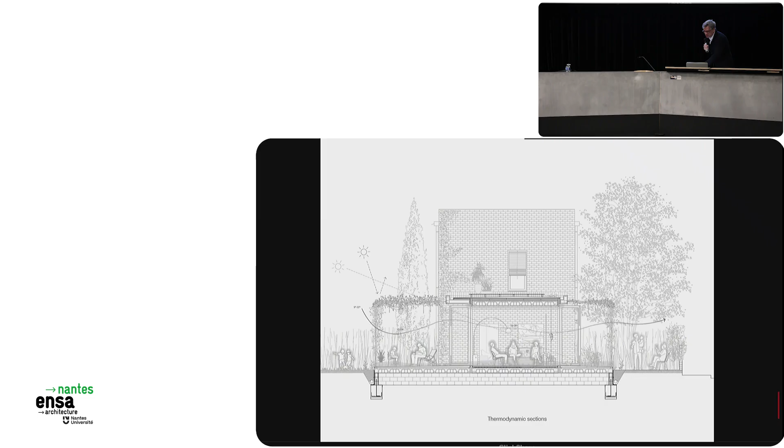During these 15, 18 years, what has happened is while we were doing very tough, very pragmatic, very dogmatic projects based on sustainability, where sustainability was the challenge of the office, the final objective of everything we did, doing projects in zero energy, passive behavior, being very serious in all that kind of stuff.

But we have discovered that at the end, the final experience could be really intense, could be really fantastic, even extraordinary. So it was thanks to that first approach, based on ecological concern, that we have discovered that what is really interesting is to project the experience.

So that's in general the big concept of the evolution of the office: go from sustainability to the experience, going from dogmatic strategies to projecting the human being's experience into the architectonical space.

And I think it's interesting to talk about beautiful, about extraordinary, about experience, because in this ecological crisis where we are living, we have to be conscious that we are losing the narrative. We are talking all the time about catastrophes, and we need to recover the narrative about the ecological crisis in order to present to society a hope that a better living is possible thanks to sustainability, not the opposite.

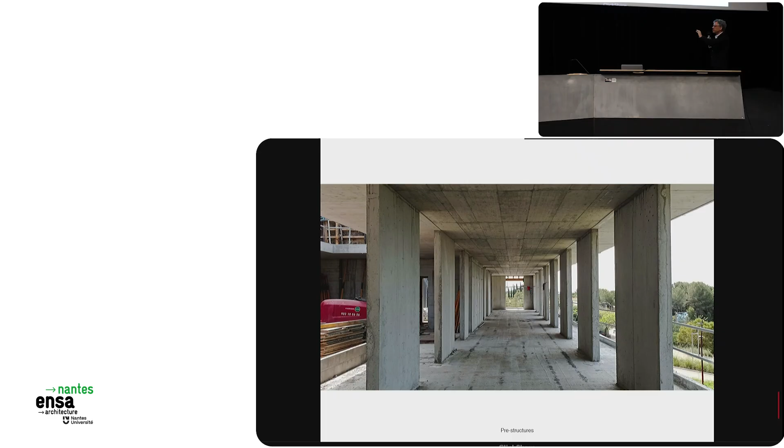But the title of this transhistorical concept is not our concept—it's a concept developed by this critic, Andrea Rubi, who, by observing our buildings, came to this idea that was quite interesting to us: that in our buildings, maybe because the structures assume a lot of attributes, a lot of the conditions of the experience, these structures link the building with a large time before the project and a large time in the future. So in his observation, the structure gets a level of autonomy, so that what the architect has done looks like just a basic occupation of the space.

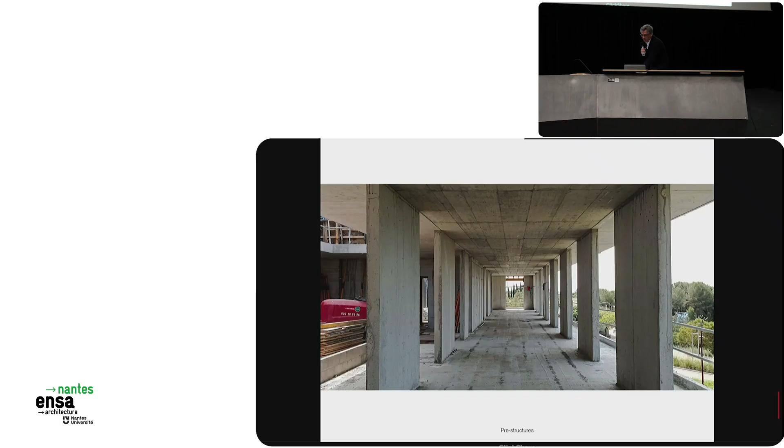So we design structures that look as if they were already there. Our newest structures look, in Andrea Rubi's opinion, like a pre-existing construction where we just basically colonize, just put some stuff inside. And I quite agree. I like very much this idea of the structure as something that tries to be more permanent, lasting in time, than just the circumstantial, provisionary occupation of the space.

Time is a continuous event. There's an idea that quite obsesses me—the idea that the absolutely new doesn't exist. The absolutely new is not possible. We are just part of a process, and we have to assume that we are just transforming matter for a lapse of time.

But by assuming this, maybe it's possible to produce more lasting structures, more lasting buildings, able to assume the change of society, able to live for longer time, and then become ecologically interesting because this structure is able to adapt to how society changes. And to give some examples of that transhistorical concept, I want to show you some projects.

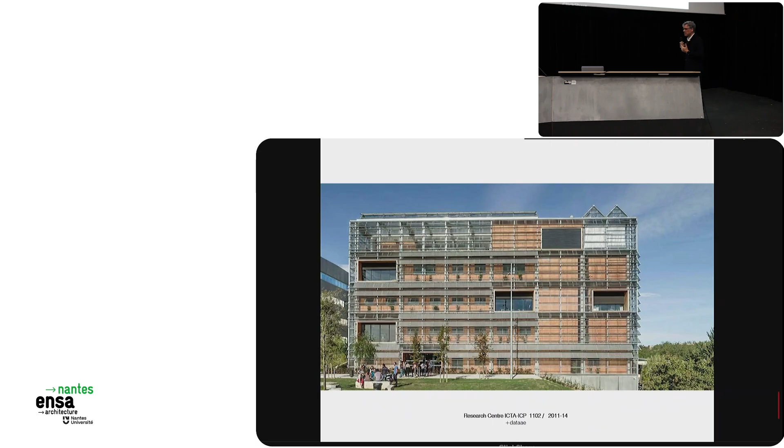This building is important for us in our history as an office. This building was done about 3 years before we did this competition, and we were really impressed and conscious about the politics and ideological level of this building. It was part of our research when we did this competition. Of course, it's not the same, but it's really nice for me to explain this project in this building tonight.

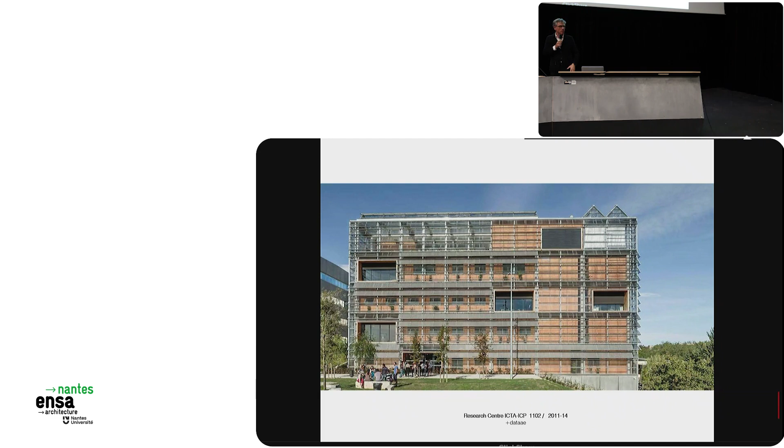This is a research center close to Barcelona for a university, focused on environmental research. So it was really important to develop a building that was really radical in terms of sustainable strategies. We won the competition by presenting a very clear, simple strategy.

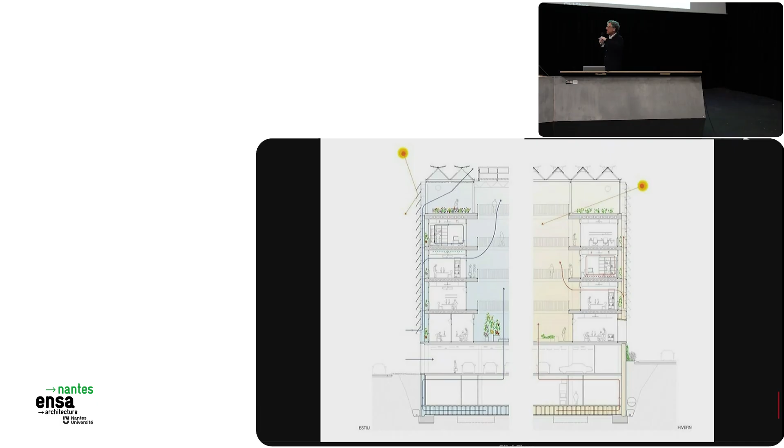It's not a building with a greenhouse on top, which was part of the commission conditions. It's a building into a greenhouse, which is a little different. We thought in the competition—and this is how we won—that just because of the behavior of the greenhouse in Mediterranean conditions, it could work as simply as imagining the greenhouse as a closed envelope during winter, getting sun gains through the greenhouse effect, and becoming a shade system in summer with a lot of ventilation to achieve comfort. Quite simple, very potent.

We developed the project with this greenhouse system, able to be completely open in summer and able to close in winter, with this double approach dividing the permanent from the available and reversible parts of the building: the structure as something that has to last forever, and the cladding system, the facade system, as something provisional that can be changed in the future.

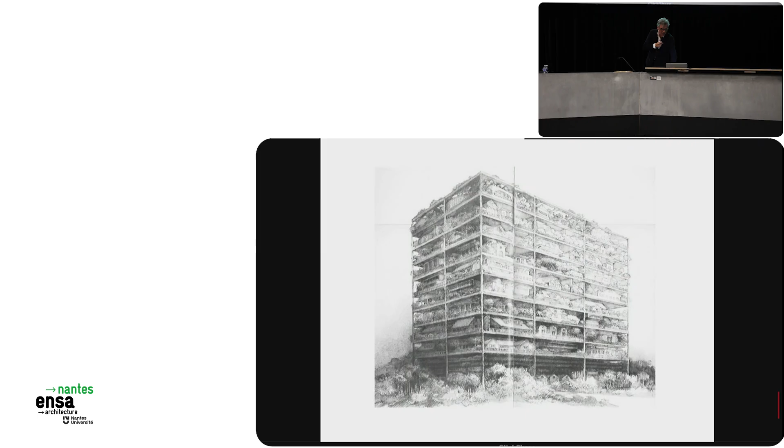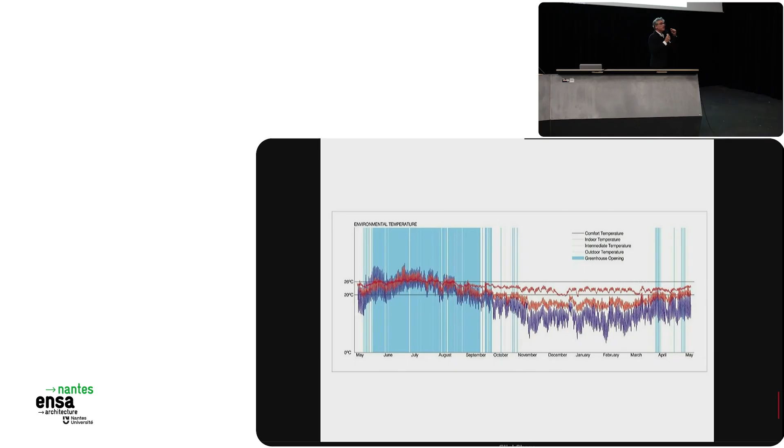The general strategy was to have passive comfort in the intermediate spaces, and just in the closed spaces a little more active systems. But it was not enough. Comfort was only possible when we introduced the weight, the heaviness of the structure, into the simulations—when we introduced the inertia, the physical performance of the structure's mass into the system.

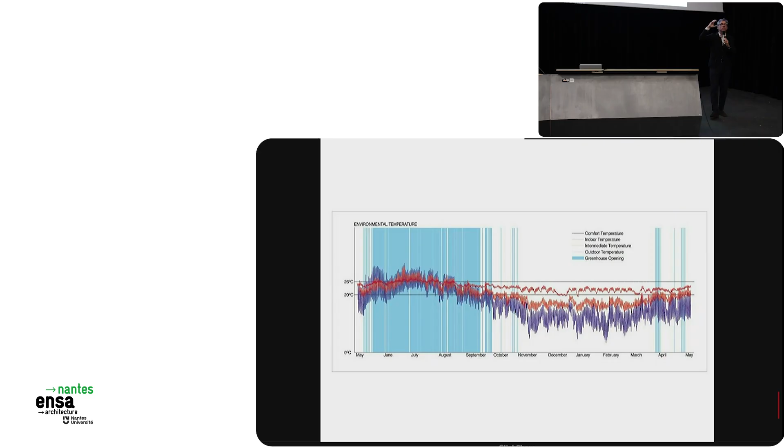Then summer comfort was possible, because the inertia, the mass of the structure, works as a sponge—it works like a storage of energy. During the day, this weight stores the excess heat, and during the night, thanks to natural ventilation, the excess heat dissipates. So just when the structure came into the simulation, comfort became possible.

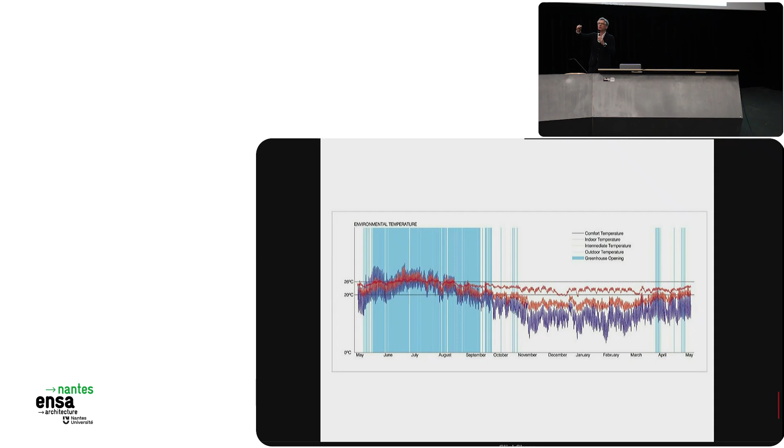From this step, we decided to make clearer this idea that there's something permanent, which is the structure, and something reversible, which is the provisional divisions, the facade. And not only that—the structure is not only a supporting performance part of the building, not only a tool that helps balance temperatures during the day and seasons, it could be something else: the real heritage of the building, the real state of the building.

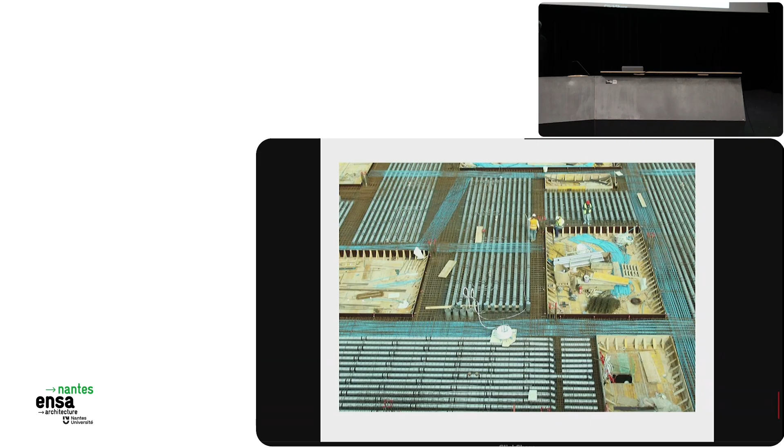So we began introducing all the attributes possible into the structure. It's about the structure, about the support, about the temperature, but also about ventilation, also about active systems. We placed the heating and freshening systems into the same slabs. We placed everything, even acoustic conditions, by framing the structure in a sinuous silhouette to help the acoustics.

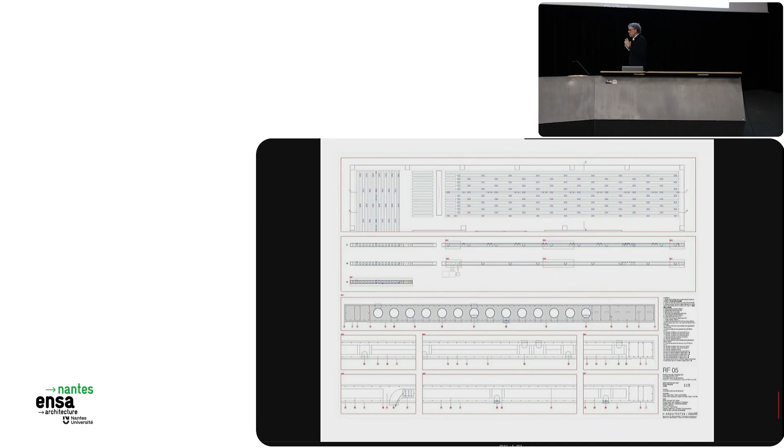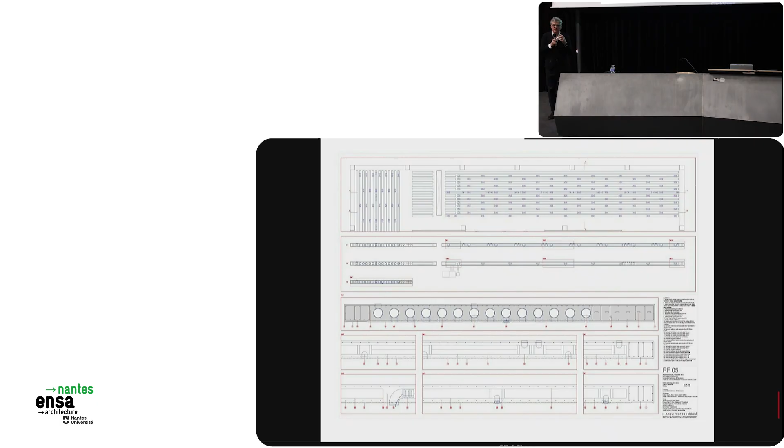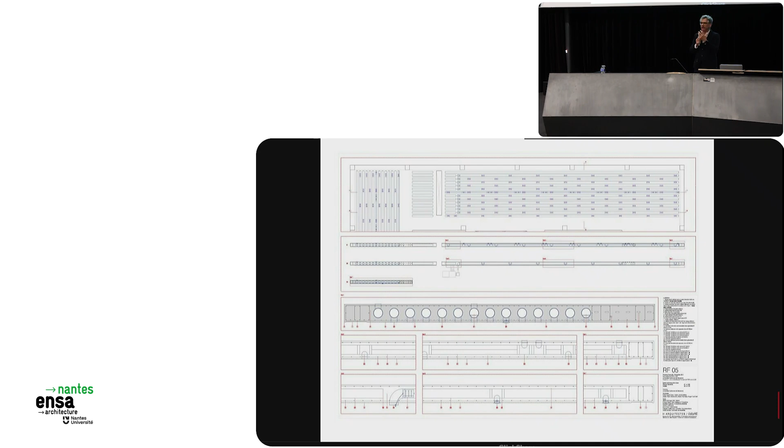So this was the first building where we began with this idea that the structure is the part of the building we are interested in giving most of the attributes of the experience. This is something that makes the experience stronger and more clear, because it's in the most permanent part of the building. The rest is pure occupation—just a colonization that will change with time.

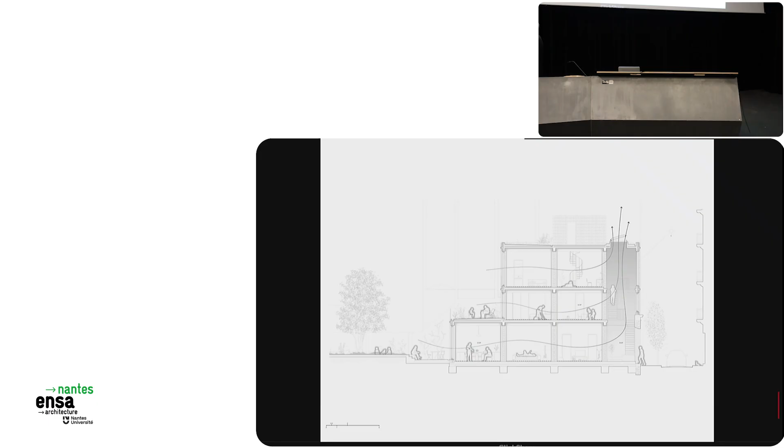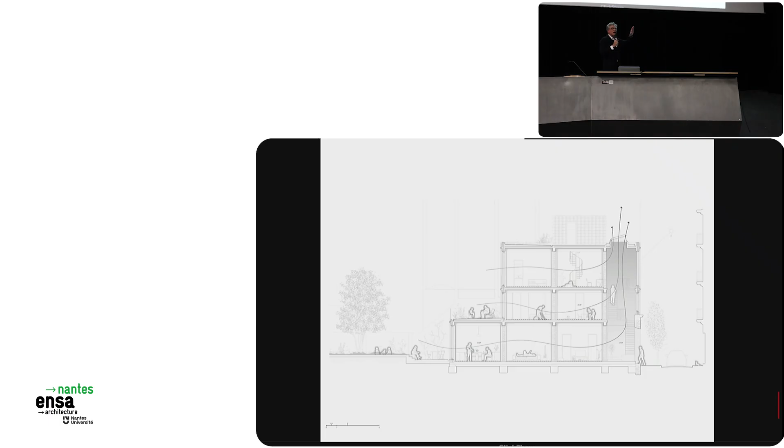This is an attached house in the center of Barcelona with a very simple strategy based on section. The section divides privacy: daily activities on the ground floor, kids on the first floor, parents on the second floor. It's an easy section with open space, no divisions. But in this case, the structure is what I'd call a filter.

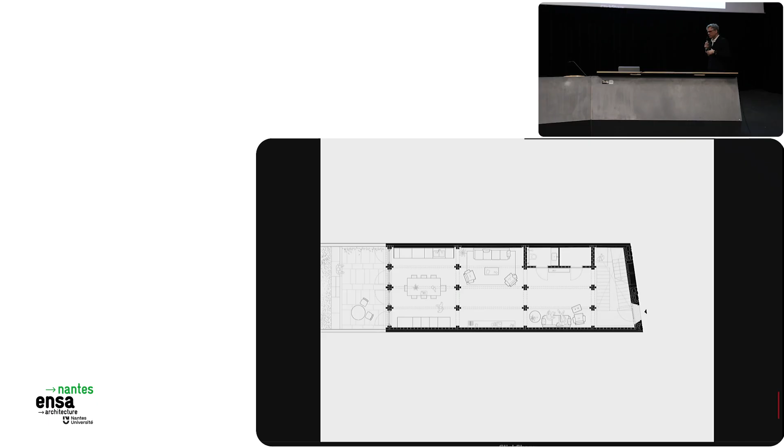The structure works as a filter that transforms the experience from the most public part, which is the street, to the most indoor, private and specific part, which is the garden. Our intention to give attributes to the structure was, of course, about thermodynamics and so on, but also about geometry and how to give a very specific experience based on the geometry of the structure.

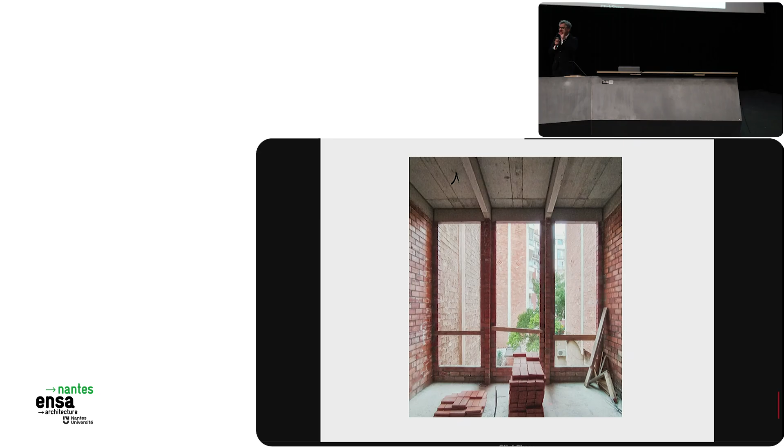But in this case, everything is structure. Even the windows are the structure. The distance between the columns, between the pillars, is exactly where the windows of the house are. Everything is based on the structure. All the attributes of the experience come from the structure. The rest is just occupation through furniture done by the owners, and nothing else.

The beautiful thing about this house is that one day a neighbor was just crossing in front of the door. The door was open, the lady owner was there, and the guy caught sight of the house and asked to come inside. The beautiful thing was that this guy asked the owner, what was here before? The structure is new, but his sensation was that maybe it was a former industry, maybe a workshop, maybe whatever, it doesn't matter.

The owner wasn't very happy with this question, but for me it was fantastic, because it captured the idea that the structure is new, but links the experience with something previous, so maybe it's also linking to the future. I think this is a guarantee of lasting, a guarantee that this building will be able to be transformed, to assume different programs, different uses. For me, this is my interpretation of this transhistorical concept developed by Andreas.

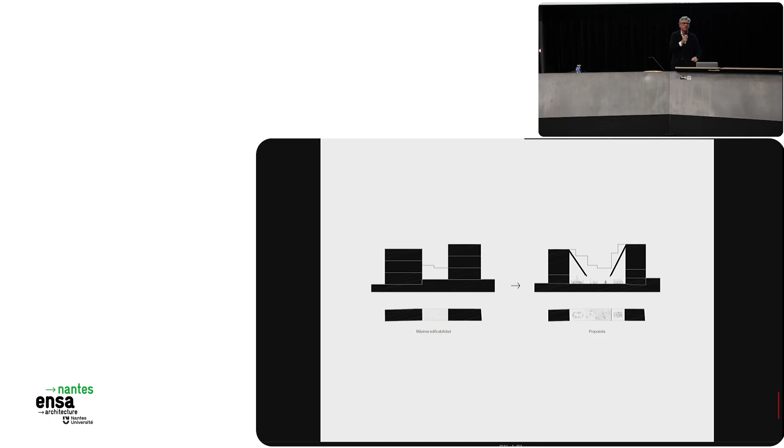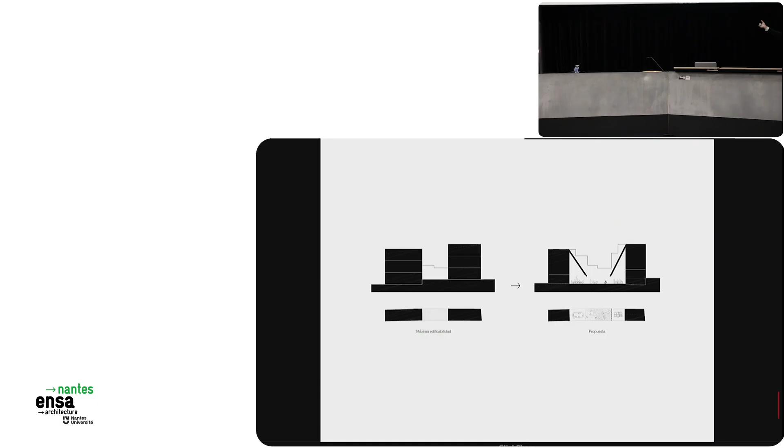This is a showroom that we've just finished, an event space for small events. It's also highly defined by the structure, but in this case not only because of the geometry—in fact it's an attached house, you just can't do a section like that. We developed this geometry with the structure in order to produce a bigger space as the combination of two chapel-like sections side by side of the garden.

It's geometry, it's structure, okay, but what was specific about this project was that the partition walls—the walls that divide the plot from the neighbors—were very, very weak. They were built with rammed earth, pure earth, very weak walls in very bad condition.

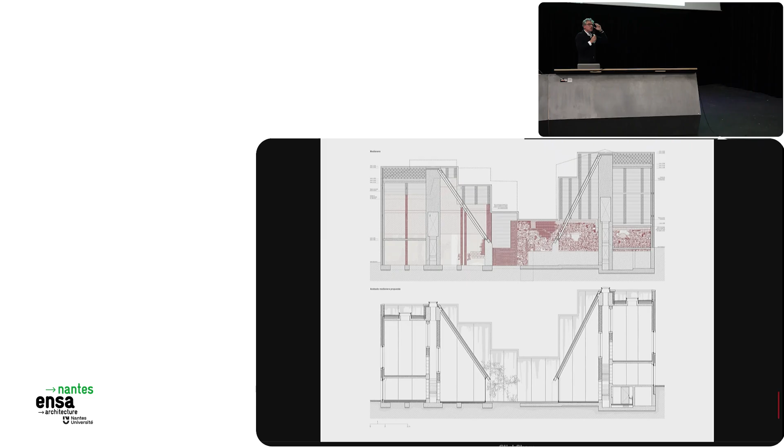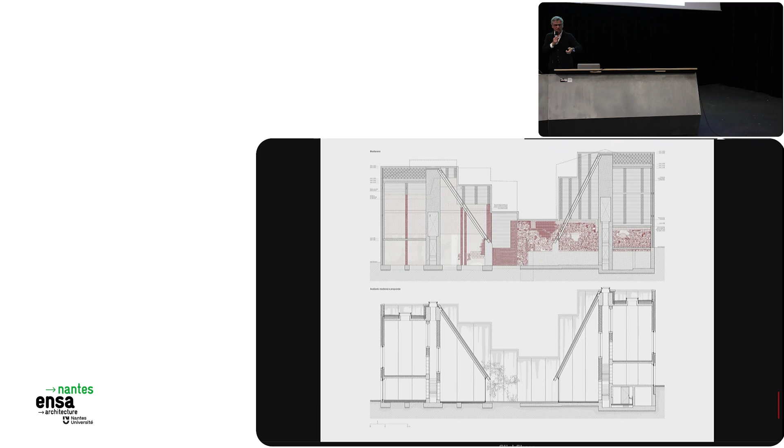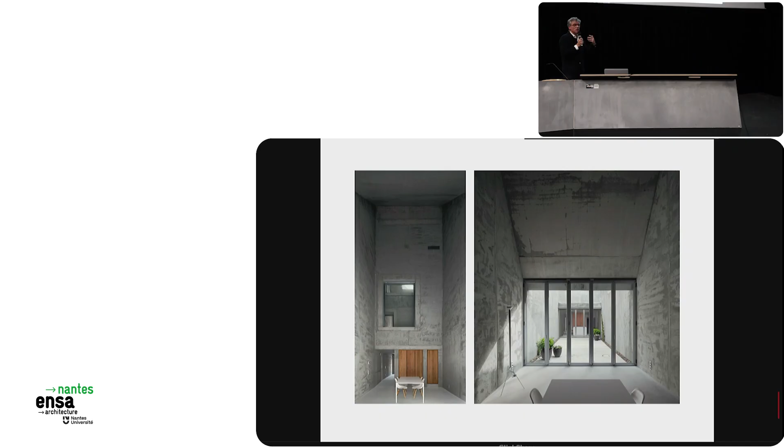So we decided the way to reinforce the structure was by projecting concrete. This construction process became interesting as part of the experience, because it produced a very specific texture, a very specific color of material, a very specific process. So we decided not only the partition walls but all the structure of the house would use the same technique. The structure is not just geometry, not just an inertia and comfort tool—it's also part of the experience in terms of color, texture, and again showing the constructive process. The rest is just a pure and very basic colonization with furniture and some lights.

So again, to be radical—I don't know if we are kind, but we try to be radical at every step of the process, in every new commission and so on.

At the very beginning of the office, we used to be a small office. Now we are a small office in Barcelona. But our first 10, 15 years, we basically did houses, private homes, but we approached that with a very simple program.

Always reviewing and trying to go deep in the concept of shelter—what it means to live, what it means to be sheltered, what it means to be living in a house.

But now, during the last 10 years, more or less, we've been lucky, and we've won some, maybe a lot of competitions for public buildings, for public facilities. And we have tried to do the same with the public buildings, to review what's the deep meaning of a public facility.

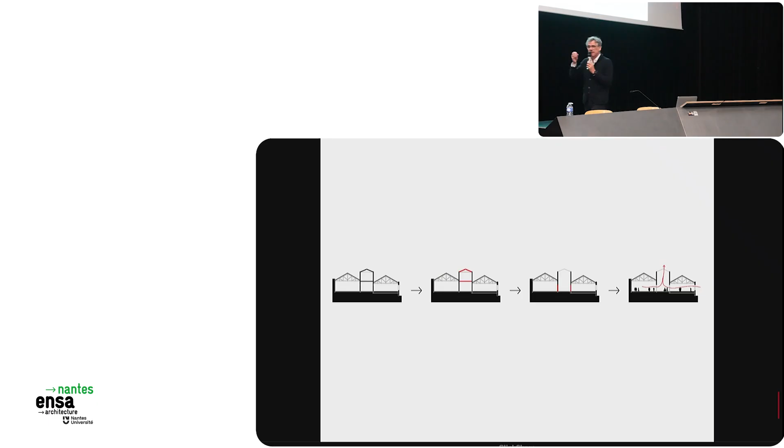In this case, that essential space, that primordial space where important things happen, where the social happens, it's not specific inside the space. It was the idea to enlarge, to introduce the public space that surrounds the building, so the streets, into the building itself.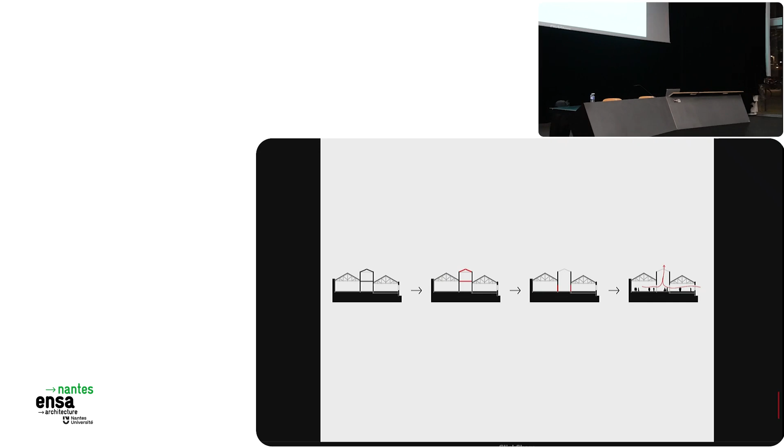So we have developed a real street. We have divided the building. We have introduced real public space into the private property, okay, not only for

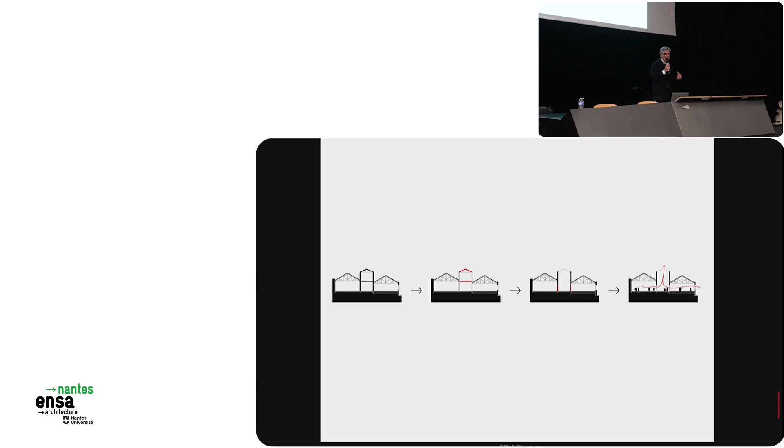comfort and thermodynamical reasons like the scheme, but also to produce this space for gathering, this space where people come together, where people arrive, where the unexpected happens.

I think that being in this building with this ramp, with all what happens here, it's easy to understand our strategies, at least in this kind of ideas, okay?

But it's a complex program, so it's not only about this intermediate street space, it's also another interesting thing, which is that in that kind of industrial spaces—beautiful, huge, large, with beautiful natural light—the real challenge is not

about how to introduce comfort strategies, because by introducing more insulation, making new windows, you can achieve better comfort in that kind of industrial buildings and larger, diaphanous, continuous spaces.

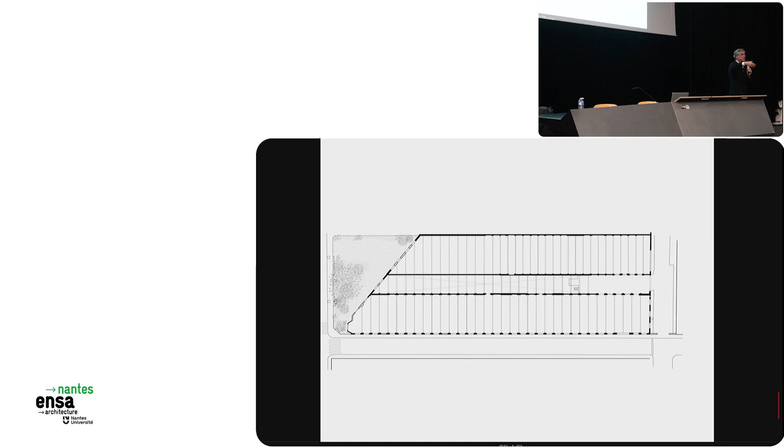The real challenge in that kind of space is how you introduce hierarchy, how you introduce order, how you organize activities in a complex program into a building whose better attributes are based in this non-hierarchy space—huge, continuous, diaphanous spaces.

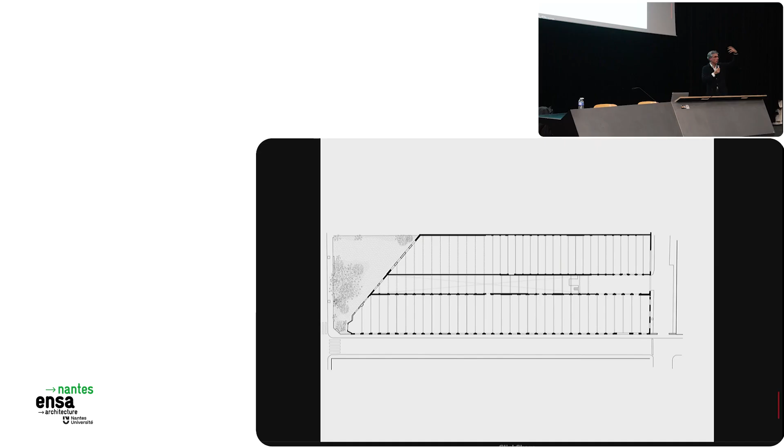In this case, the way to introduce order was by using natural light to organize the space. So we did that kind of inside courtyards just with pure natural light that makes order and divides the space, because the timber columns don't close the space—it's just like a filter from one space to the other.

This is a building that's really open, like a real street, able to be visited. I invite you, if you never come to Barcelona, this is not far away. It's a beautiful place to go.

The beauty of this building, and I'm trying to be really true, is with people. Nothing is more sad than seeing that kind of program in a conventional building, and nothing is more beautiful than seeing these people performing in a building based on pure natural light organization. In fact, there's an amazing data point: the autism users of the building, during the year they've been using it, their crisis rate has decreased 60% - 60% less crisis since using this building. So the engagement of people is our success, because that's what we're looking for.

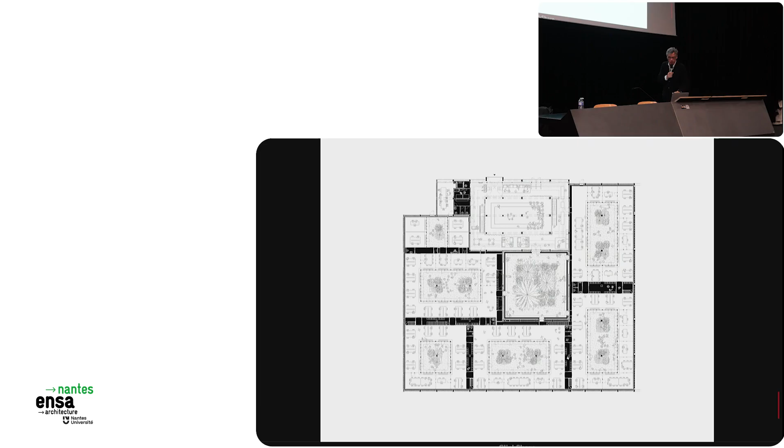It was in this case by proposing a new way of working as a group, which is horizontal, to work in a circle. In Catalonia we have this traditional dance - the project isn't based on that, but we have this traditional dance called La Sardana. We dance sardanas just in a circle. I think it's a beautiful position for a group of people working together in a horizontal relation. So we developed this system of clusters into the industrial space, where people work around something that's for leisure.

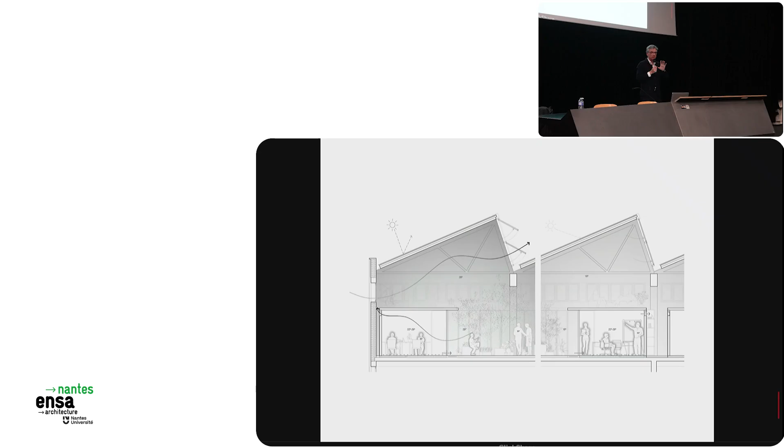This building has 70% of its surface not for working, but they work fantastically, and they work a lot, and they are happy. Well, to work in a pharma company means to be happy for sure - the salaries are fantastic and so on.

Everything works in the same way, even the central courtyard works as a real cluster, and all the circulation of the building is based on this central circle. So everything is a group of circles.

So I don't want to look obsessed, but we are. The problem of being four partners - the one that scares you more is not your client, not the public administration, it's your partner. When you arrive at the office, they look at you - we agree on that, we agree on that strategy, so let's go forward, let's go strong, let's go tough, let's be really radical in what we've agreed at the office. And I think that this is good.

Our agreements are based in a continuous conversation, a continuous dialogue, continuous working at the office, talking, and in that idea of research, not construction. We are old enough to have a lot of tools, to know a lot of techniques, but to research what's the deep meaning of the stuff we deal with as architects - homes, shelters, institutions, public programs and so on.

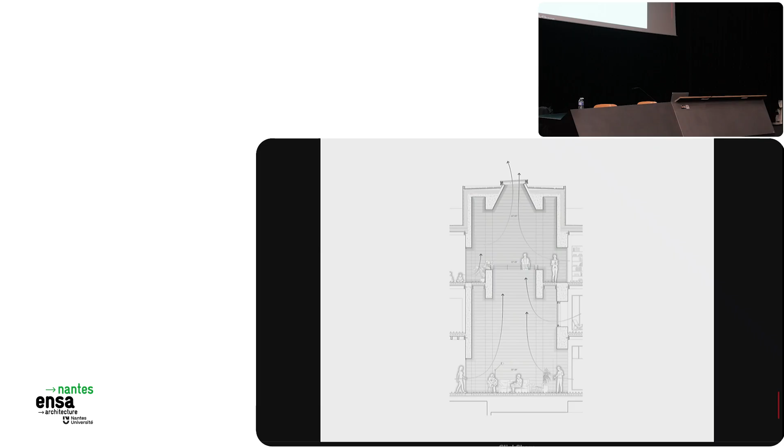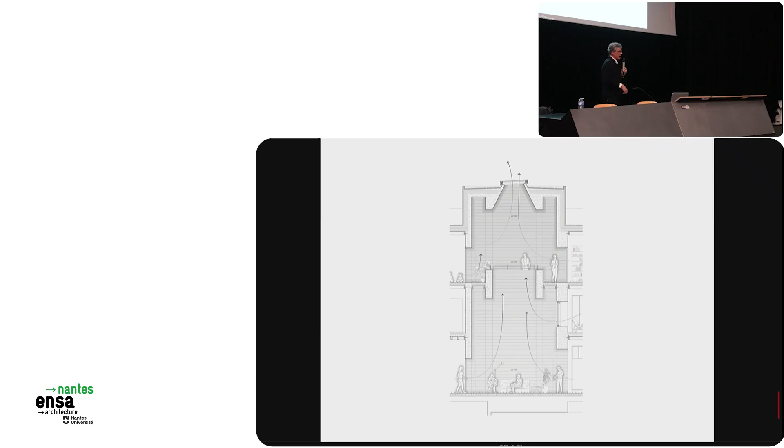Because rain is vertical, gravity is vertical, stratification of temperature, so energy is vertical. Natural light is vertical. So in that idea of projecting the experience, not projecting the building, but projecting the conditions for the experience, the vertical for us means a lot of new natural attributes for the experience: to feel the air, to feel a natural temperature based on inertia, based on stratification, gravity, and everything. So this singular, maybe strange, maybe bizarre, but extraordinary space happened because it's very clear to us that vertical is more natural than horizontal.

This is another example of the same. This is a house where the south side of the plot had this terrible neighbor, so high it was impossible to get sun gains from the south. Granollers is a small town close to Barcelona, very strange because the plots are not north-south direction, which is very common in Catalonia. It's west orientation.

So in this case, the west gives us the worst natural light in the Mediterranean because it's very hot. It's the worst orientation. I was amazed in Belgium, they always ask to have the sitting room facing west, because when they arrive home they want to have some sun. But in Barcelona, the west is forbidden. And this noisy avenue was west orientation, and on the south, the only way to get sun gains was forbidden because of the neighbor.

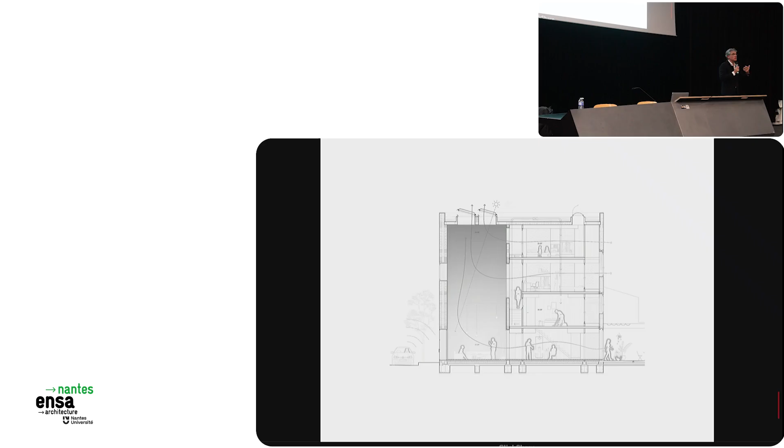So because of these very objective conditions, we come again into that very vertical space, which is the seating area of this house.

Which is quite extraordinary, but believe me, in both cases—well, in the previous house—this house won an award a couple of years ago. And the jury came to visit the house, because it's one of the only awards in Spain where the jury visits the buildings. I remember going to the house half an hour before the jury arrived, to see if the furniture was all right, if everything wasn't too messy.

And I found the user, the owner of the house, seated in the middle of this very vertical impluvium, sitting on the sofa with a dish of pasta, watching TV, with the skylight completely open. You felt the air crossing, and it was his happy space. It's not about the preconception of what a sitting room should be—it's about the fantastic experience that guy was having in this space.

And this space is the same—it's the same situation, a different couch, but the same kind of guy eating pasta in front of the TV. That's the only way to get sun gains from the south: having the same height as the neighbor.

This is another concept that is not from us, but we feel really comfortable with—the idea of the urban living room.

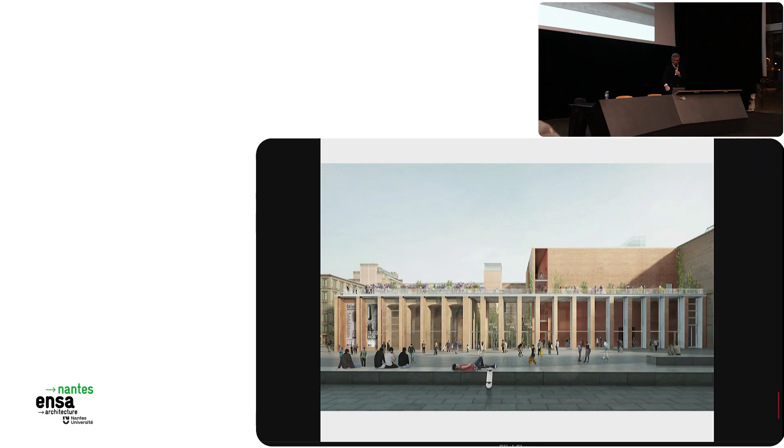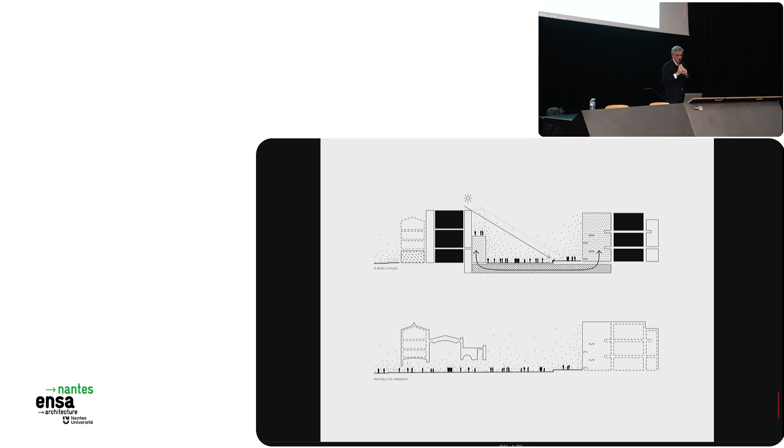This is for a lot of reasons, also for the image of the museum in front of the city, because what's supposed to be important in the competition brief, the exhibition spaces, asks for a building height that's really a bit too much for the neighborhood. So we decided to put this gallery in the middle, between the exhibition part of the museum and the public space. The gallery is half the size of the museum, and it's not only a question of a skylight, it's a question of producing this kind of public space that is not only an entrance, not only a gallery, but also the space where the unexpected in the museum happens.

It's a completely public part of the building. There's no control to enter this gallery. The control is only when you try to enter the exhibition part.

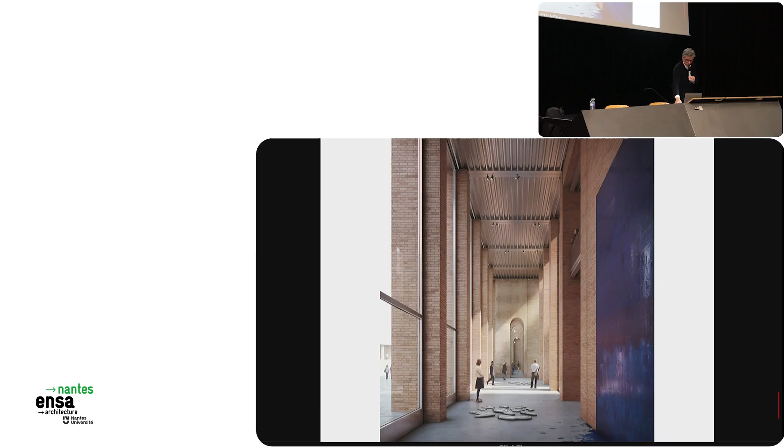This is the third example of the urban living room idea: a competition we won just six months ago for the National Catalan Art Museum. This is just close to the Mies van der Rohe pavilion. The building is an existing exhibition hall built in 1929, the same year as the Mies pavilion, a huge exhibition hall built at that moment.

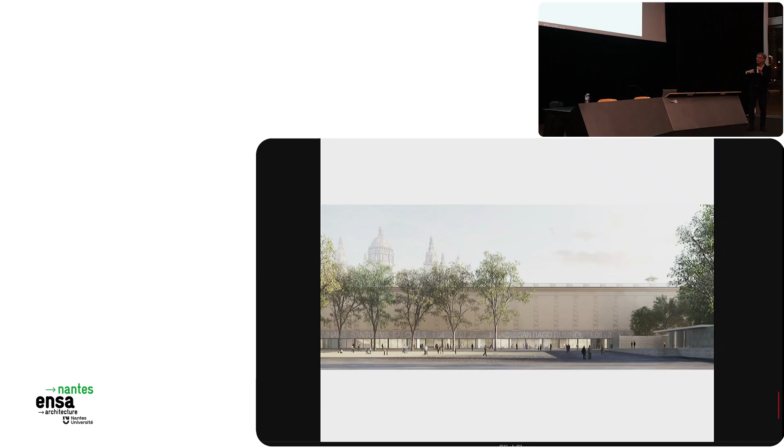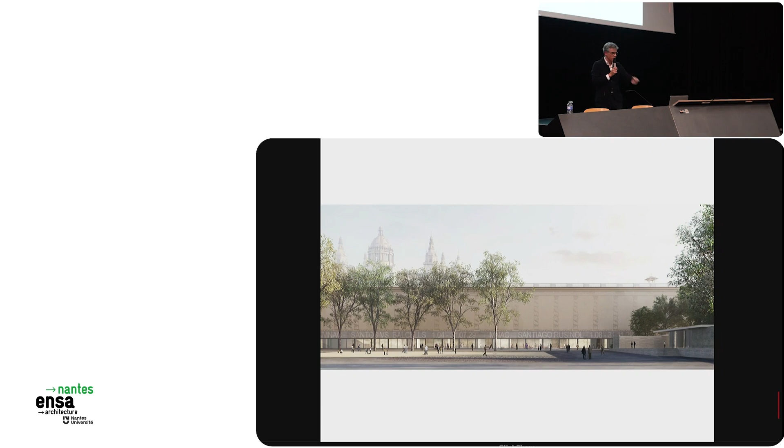The idea is to take the present-day National Art Museum of Catalonia at the top of the hill and double the surface of the museum in this former exhibition hall. What we've done is create a large, infinite, open space again to erase, to blur the idea of a door, the idea of just one entrance, and to produce a more generous relation with the public space. But when you come inside, it's again a public space.

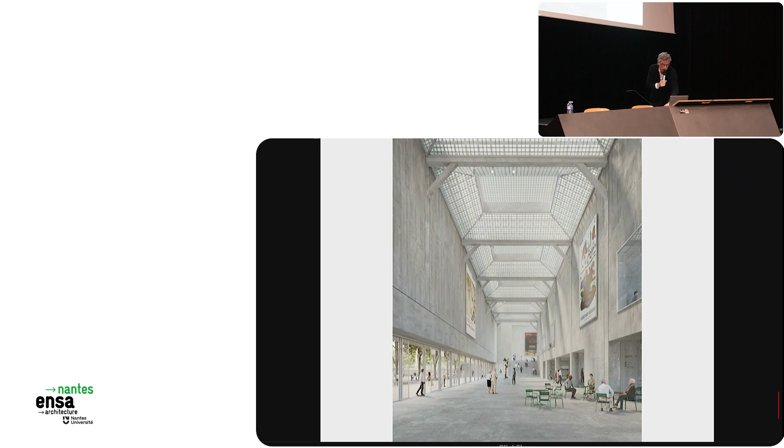Instead of doing like the rest of the teams, which divide the exhibition hall with a large hall or a large lobby to have access to all the program, we prefer to do this street that surrounds all the exhibition hall, adapting to the topography of the hill, with that kind of roof based on skylights from the former building. It's again this idea to enlarge, to introduce the public into the building.

It's about vertical, but not just about vertical. In that sense, we work in dialogue with the people at the office, not only the partners but everyone working there. We have just one very large table, and we are 20 people surrounding the table. The partners don't have a specific place, we don't have a chair at the office, we move around the table. Well, we have chairs, but we move from one to the other. We're all the time talking, dialoguing, but the elements we share to discuss are very clear, tough schemes, black and white schemes, that kind of simple, easy drawings that try to demonstrate the strategy.

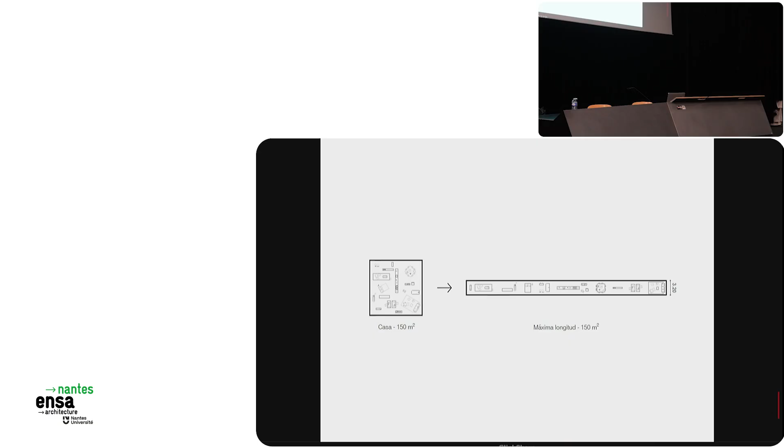In this case, this is a very small house in a very big plot, a plot of 6,000 square meters in the middle of the forest, in a very beautiful countryside place. But for urban normative reasons, the house can only have 150 square meters. I think here in French that's the limit between having an architect and not having an architect. Here, there's an architect. But it was like this small, 150 square meters.

The problem with that dimension was that in the middle of such a big, beautiful landscape, we felt we didn't have any tool to come into dialogue with the place, to perform with the place, to have a relation, to interact with the landscape. So we decided to have at least one really large dimension, one that really led us to produce some relationship with the forest and the landscape.

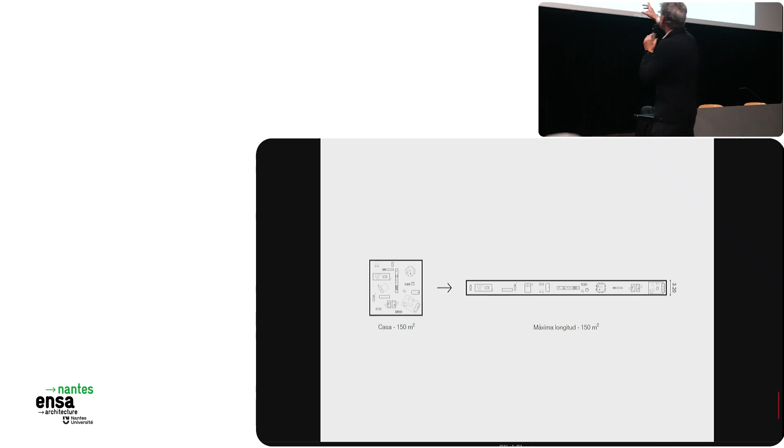So we decided to develop that 3-meter wide house. We just placed this dimension and multiplied it by almost 30, more or less 32 meters. And we placed the same furniture, the same activities, the same uses, all across this large dimension. It's 320 centimeters, the minimum dimension for a hospital bedroom, the minimum dimension for a hotel bedroom. It's the 2 meters of the bed plus the wheelchair movement.

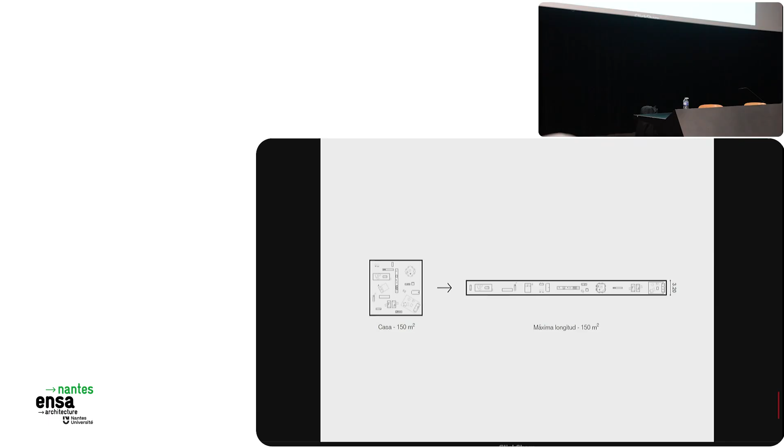So thanks to this radical proportion, we were able to transform the geometry into a shape that produced this outside seating facing south, and that produced this small oasis in the middle of the forest.

And thanks again to this, you know the Spanish architect De La Sota? De La Sota has a beautiful sentence, he always said that architects have to give the clients 'liebre por gato' — rabbit instead of cat. After the war in Spain, it was typical in restaurants that you ask for rabbit but they give you cat, because it looks similar and they were so poor. De La Sota's sentence was that we architects have to give the opposite: for the price of a cat, we have to give them something really good to eat. So when we do this, the strategy looks very simple in terms of geometry, but we try to give two, three, four better results beyond just the pure idea of geometric performance.

So thanks to this geometry strategy, you achieve privacy into the house because on one side is the bedroom, on the other side is the seating, and on the other side is the kitchen with the dining. There are no inside walls because privacy is achieved just because of the geometry of the U-shape.

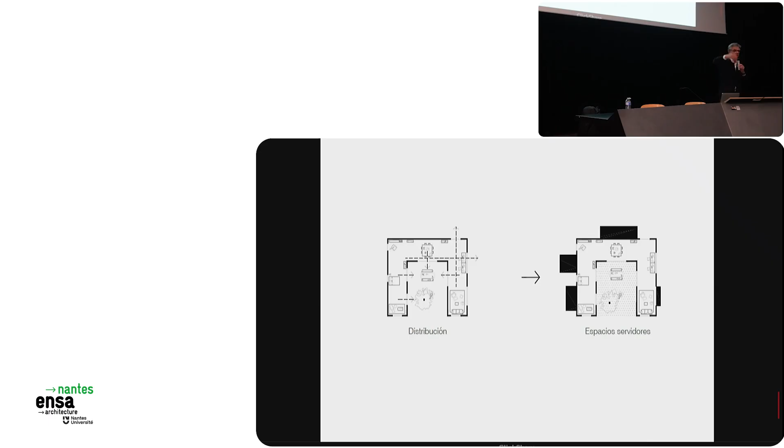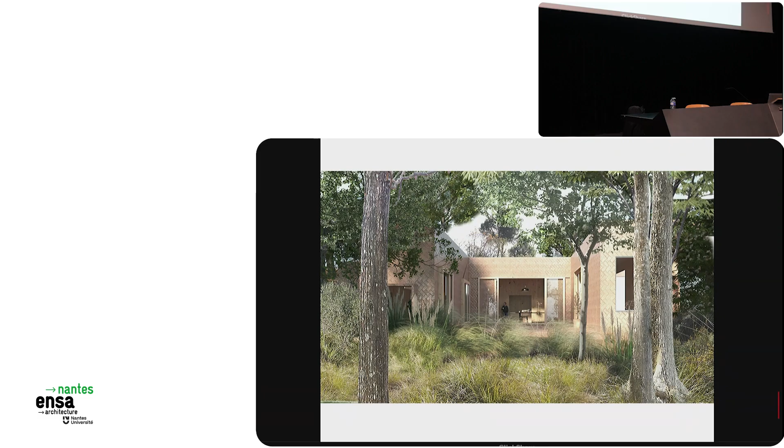But we are not able, we at the office, we are not like that. We know for sure that after a good strategy there are a thousand different options, different decisions, proportions. After this schemes phase, we take a lot of time to check hundreds of different options in terms of pure visuals, because we use models and images, but also because we understand that behind this image and this scheme there's an experience that, because of our previous experience, we are able more or less to imagine. So we do hundreds of images to check proportions, to check materials.

This is also another radical scheme. This is a public housing dwelling in Barcelona again. We work basically close to Barcelona. One of the good things of the office is not the money, but that we were really close to the site, so we are able to do a lot of visits and really managed to be involved in the construction process. This is a competition for this public building, for this public housing.

When we decide what kind of competitions we want to do, one of the things we always check is the difference - and this in housing in Spain always happens. I don't know about in France, but in Spain the maximum constructed surface is never the same as the surface resulting from multiplying the footprint by the number of floors. If you multiply the footprint of the plan by the number of floors, the surface is not the same as the maximum surface the norms let you build, because they are imagining you're going to do courtyards for ventilation or whatever.

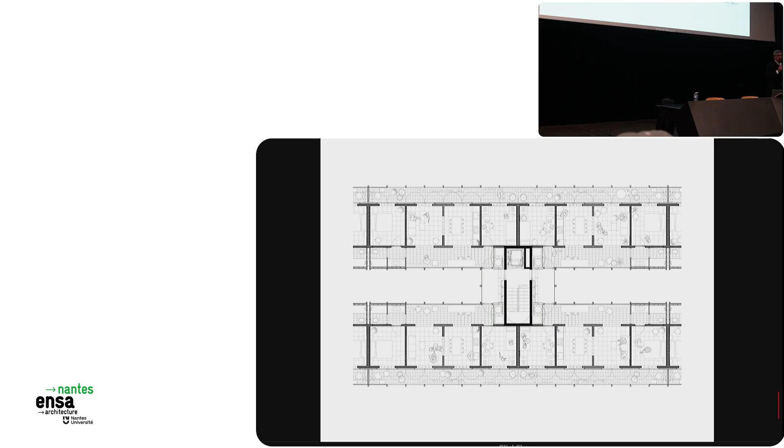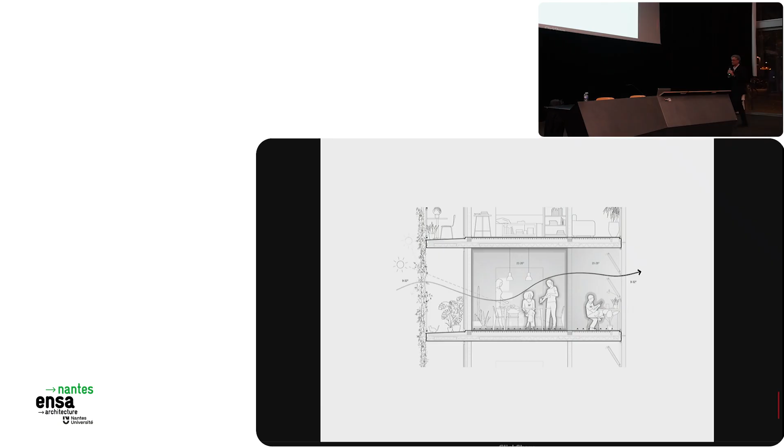So you come into the gallery and then you open to the terrace.

As I've told before, not at the very beginning of the office, but after some competitions, some buildings, some houses, we were more or less positioned in Barcelona, in our surroundings, as an office concerned about sustainability, natural behavior, and all that. We have changed our interest, but we haven't changed our radicality in being concerned and compromised with these sustainable standards.

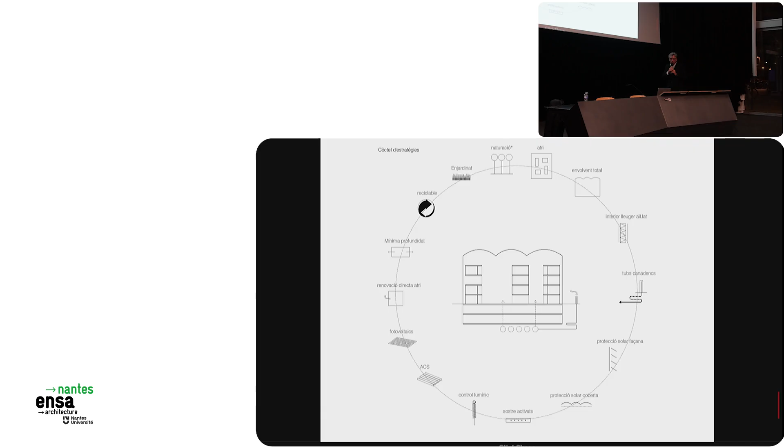But at the beginning, we were so ambitious. We were absolutely concerned about ecological footprint, low embodied energy materials, passive strategies. When you need active systems, place them in the surfaces, not in the air, and so on. Domotic, very sophisticated domotic systems to control all the performance of the house or building. But we have changed that into something more simple, more tough, more resistant, less able to get broken.

Which is basically inertia and natural ventilation, mass and natural ventilation. This is something that works quite well in our climate context. It's not something you can extrapolate or translate to other climate conditions, but in our case, every project makes it more and more clear that this is the good strategy in order to get this natural comfort. So the more the inertia, the more the mass, the better the building performs.

So we have done a lot of research in massive systems. We are 4 partners. So I know you know how difficult it is to work as a team in the studio when you are a pair. So imagine being 4 as partners.

It's quite messy. In our case, the way that from the very beginning of the office we've been able to come to an agreement was because we never put personal desires over the table. We never said, I want something, I have a desire. We always try to discuss very objective, simple things, simple strategies.

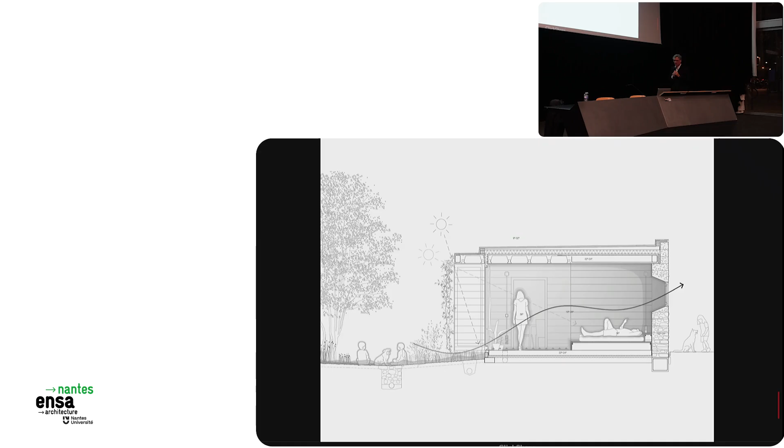And this is two examples of that research. This is a house in a beautiful place in Catalonia called Ullastret.

This town is very defined because they have this very strong, tall stone wall. It's full of stone walls. All the plots, all the facades, even the orchards, even the agricultural plots, are defined by huge stone walls.

And in this area of Catalonia, we have this terrible visual normative for tourists that all the facades have to look like they've been built with stone. It doesn't matter if it's just a cladding, if it's just something glued over, but you have to look very old, you have to look like stone. It's just a visual approach, but it's part of the norms.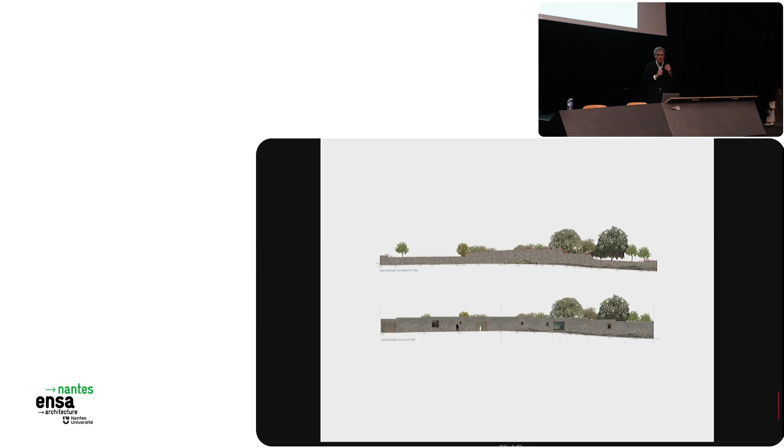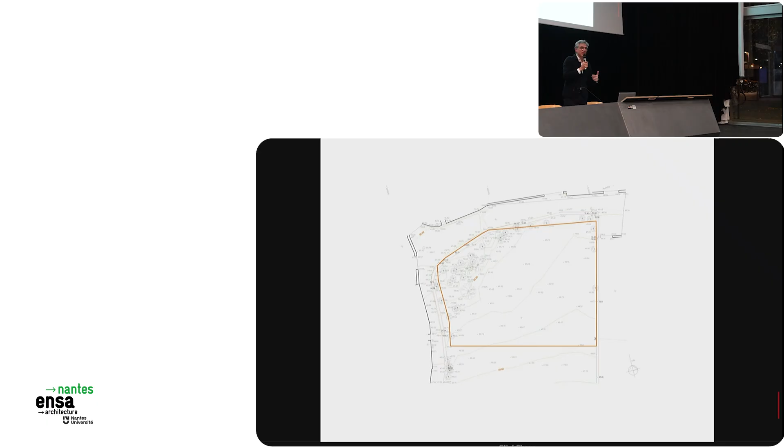But when we went to the council to ask for permission, suddenly they told us that the stone wall had to be demolished because the vans, the cars, the trucks were not able to do the movement in the corner. The street was so narrow that it was difficult for cars to maneuver, so the street had to become a bit wider and more comfortable. It was terrible because the strategy was so clear, the facade was already there, but the wall had to be demolished. So, a little bit against the heritage, this is the demolition of the stone wall.

We asked the heritage, or the pre-existence, if it was still able to perform—in terms of structure, in terms of behavior, of natural comfort, and so on. The wall was not there anymore, but the stone was there, and the stone was still able to work in a compressive way, to give a lot of inertia to the walls.

So we developed this kind of aggregate combination, and we did that with the objective to make a just-one-wall house. This house is just one layer of wall—there's no insulation layer, there's no facade layer, there's no rainproof layer. It's just a white stone wall, a cyclopic concrete made with these former stones, mixed with lime mortar, mixed with the sand of the soil of the land, of the plot.

And also placing inside something that synchronizes—the context is not only the climate, not only the physics. Context is also traditions, context is also social resources, context is also constructive traditions. So here in this place, rammed earth construction is quite traditional.

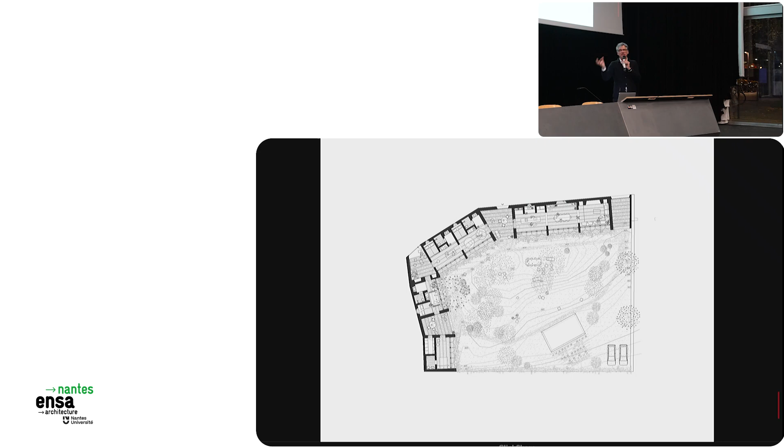We place the stones in different positions depending on the structural performance or the future facade performance. The typology is the blind wall facing the street and a pure porch facing the plot, because it's a south orientation. It's also a beautiful view of the place, and it's a very good orientation to get sun gains in summer and in winter, working as a greenhouse in winter and just a pure porch in summer.

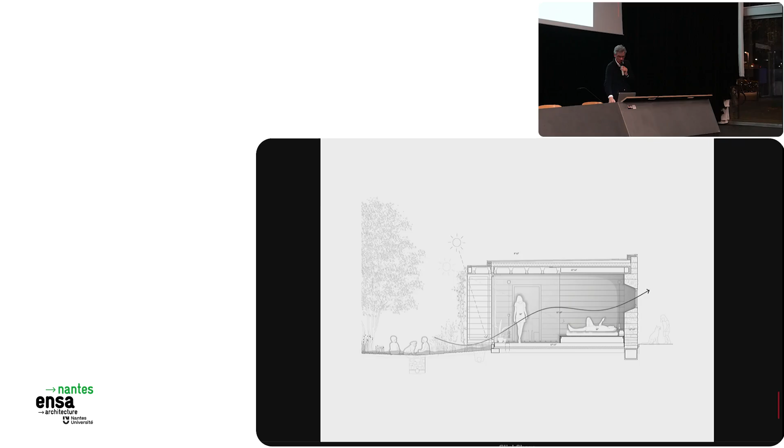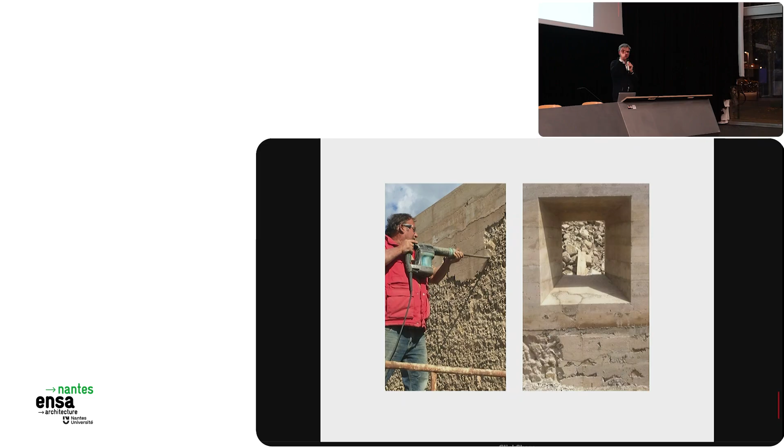But the interesting part is in the section, okay? Basically it's a porch. This is the construction process, placing the stones. And then when we finished, we just dig a little bit the facade, just the facade, in order to recover the former stones, because the council norms asked for that kind of visual idea of stone houses.

The inside is different, it's not showing the stones. This is the south facade, completely open in summer. This is a non-heating system house. It's a weekend house. It's not a cheap house, but it's not expensive either. You see that the materials, the products are really basic, really rough.

But it's cool because in winter, the owners love the house a lot, and they also want to go to the house on winter weekends. The beautiful thing is that during the week, as the house is closed, in winter the greenhouse effect makes the house warm—18, 19, 20 degrees. They arrive on Friday and the house is perfect. The fun part is that on Sunday they have to move, because after 2 days of opening and closing doors, the temperature goes down. And in summer they have a little bit of heat, but nothing that cannot be solved with natural cross ventilation at night.

This is another example of that kind of research, but it's a different product. This is in Mallorca—well, it's not a school, it's elderly people's housing, apartments for old people. It has to be placed on a plot where there used to be a school.

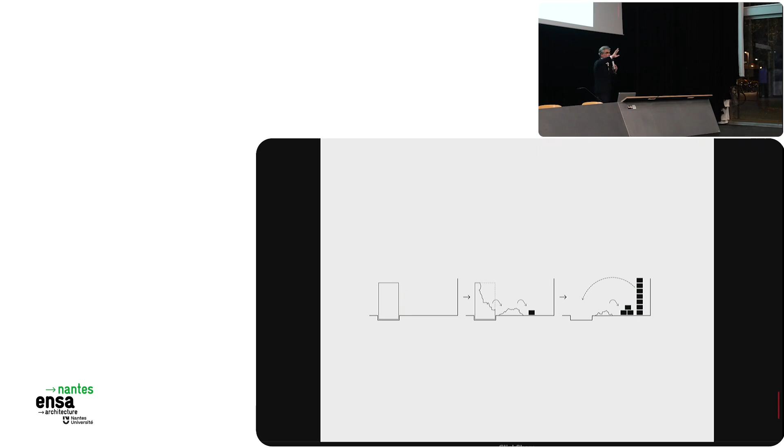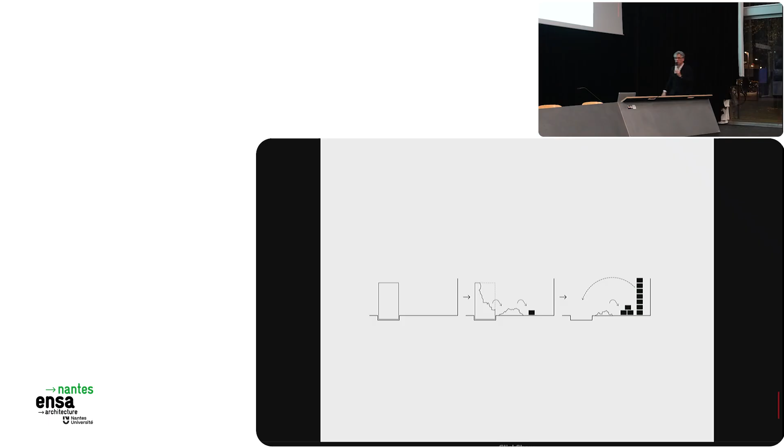We won this competition with this scheme. It was quite a strange competition—you just have to present some schemes and strategies. We presented this drawing, basically the idea to transform the former stones of the school into blocks, and then with the blocks do this kind of construction: a pure bearing wall system.

Pure means pure—the slabs are supported by the wall by geometry. So the blocks on the ground floor are 1 meter, 90 centimeters, 80 centimeters, 70 centimeters, and in this gap, this difference in the section, is where the timber CLT panel is supported. It's stable just because it's so wide. So the technique is the old traditional technique of construction with stones—the block works as a traditional stone, and it's this kind of traditional construction that in Mallorca you can still find people able to build that way.

When we won the competition, the funny thing is that the public administration in Mallorca thought they were being so generous because they weren't asking us to exhaust all the plot, weren't asking for all the apartments or surfaces possible. They thought that thanks to that, maybe bigger courtyards would happen, or a bit more terraces or gardens.

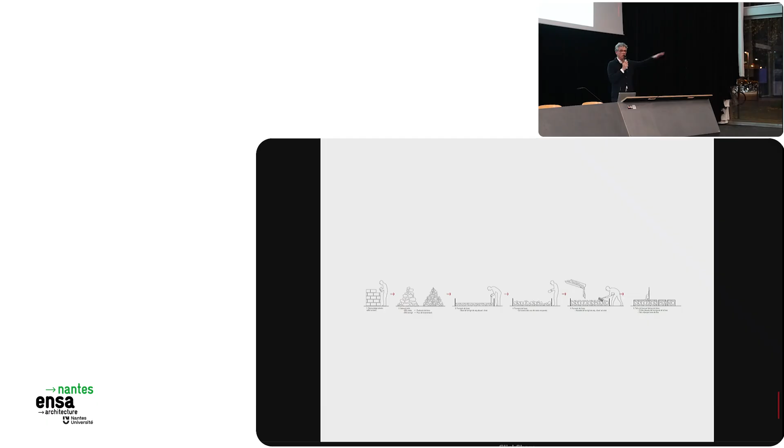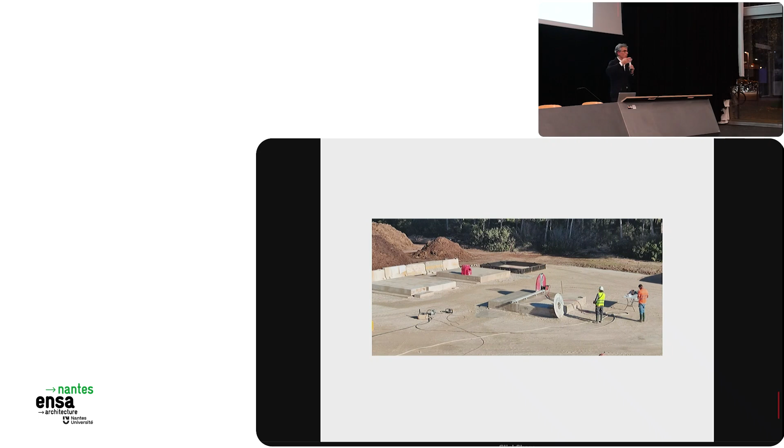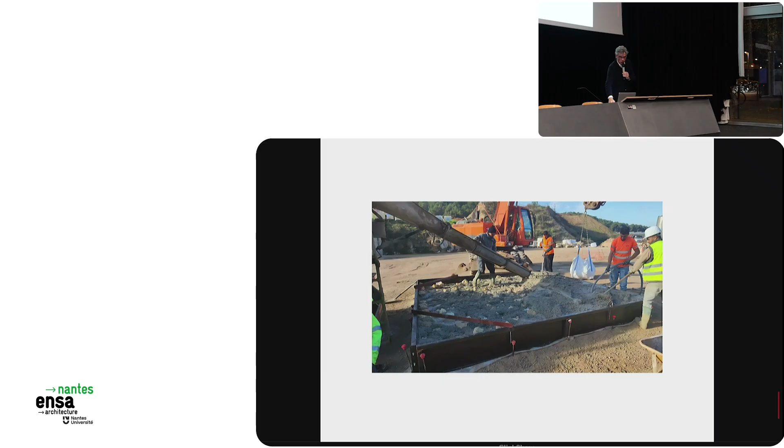So then we decided on a new kind of process, a different process, which was to produce huge, gigantic blocks. We did that kind of huge block, and then using a quarry cutting tool, by cutting the big piece, at the cut the stone shows up. So here is pouring the stones, and it's in the cut that you finally recover the beauty, and with a cheaper process too - this is far cheaper than doing it block by block. Thanks to the cut, you recover the beautiful.

So we're always in this movement from the logical, from the very objective, from sustainability, to the experience, to the color, to the material, to the touching, to the sensitive.

The blocks are like that. And this is very common also in the quarries in Mallorca, which are very beautiful - you see not only the stone, but also the footprint of the tool, of the cut.

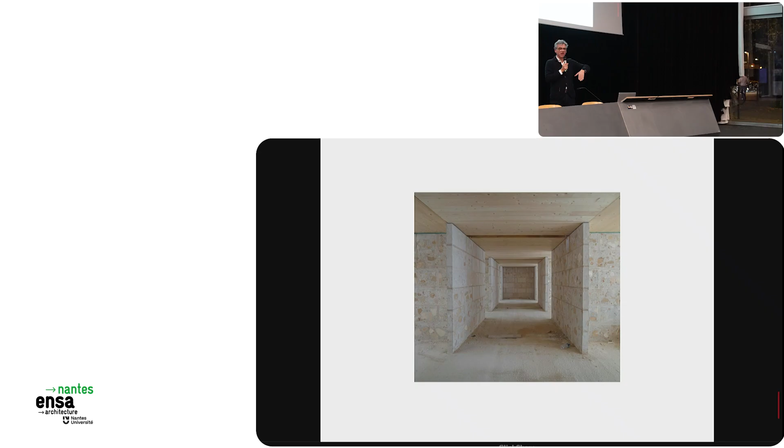And the construction is like the pyramids. It's a little bit... but it's quite simple. You need a crane, obviously, and then just the timber slabs, supported just by gravity. They are just placed over, okay. The building has been finished. Now people are living inside.